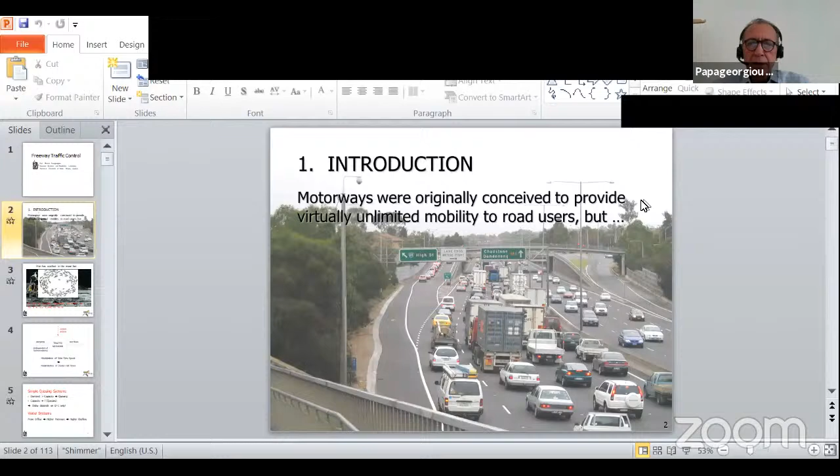And I will try to highlight as much as possible aspects in this application that are related to optimization and optimal control. Yes, I need to maximize, otherwise we have multiple—I will be maximizing sometimes and then minimizing again, because we have this bar here that I don't know how to get rid of. So whenever it is covered, I will minimize again.

Okay, let's start with an introduction. Motorways were first constructed in the 1930s, I believe, or 20s, in the United States. And the original idea was that you have a traffic infrastructure that allows vehicles to drive from A to B fast because of virtually unlimited capacity, and also without interruptions from traffic lights and so on. So the idea was that you have an infrastructure on which you can drive with your vehicle very fast.

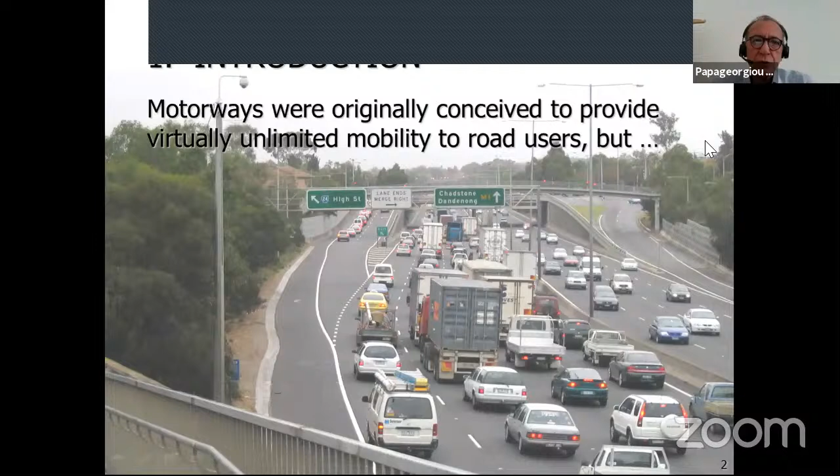But as we know, starting in the 60s, 70s, 80s, and increasingly until now, motorways look more like parking spaces rather than high-speed traffic infrastructures. So, of course, in terms of physical transportation, we have done, as mankind, huge advances. But I think more advances have been done in virtual transmission of data. As you know, you can transmit virtually unlimited amounts of data around the globe virtually instantly. While in terms of physical transportation for our everyday needs, we are still lacking behind.

And this is quite a shame for our human civilization, because even ants, even very simple species like ants, they seem to handle their traffic needs much more efficiently.

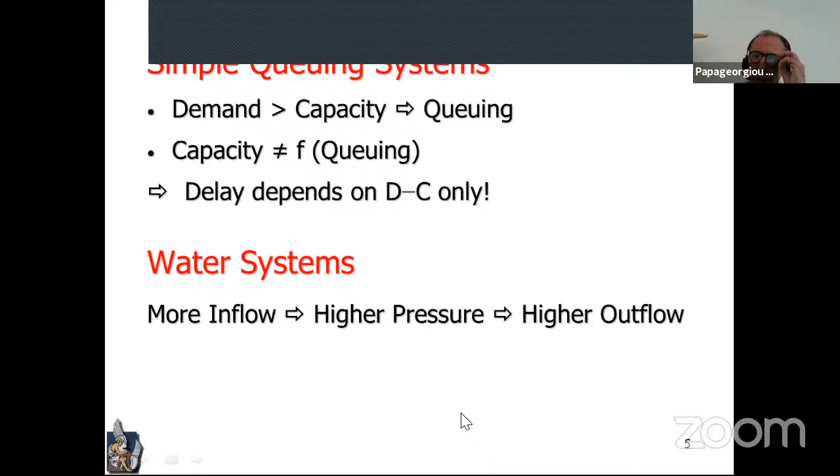What about traffic networks? Well, in traffic networks, we don't have the case of the simple queuing system, and even less the case of the water system. So in traffic networks, if there is queuing, if there is congestion in the network, this degrades the capacity of the infrastructure. And the reasons for that, in the case of freeways, may be slightly different for different kinds of traffic networks. But in the case of freeways, the reasons for this degradation will be explained in a couple of minutes.

So, what is the implication of this? The implication is that if you have a big freeway network, and then at some local link, due to more people temporarily entering the system, you have a higher demand than the local capacity, then you will have a local congestion, and this congestion will degrade the local capacity. But if the local capacity is degraded, then we will have an accelerated increase of congestion, and this will lead to a further capacity degradation, and this will still accelerate the increase of congestion. So you have a vicious circle, a positive feedback here. The system is degrading, and at the end, you have a generalized congestion in the network, which degrades the nominal capacity of that network.

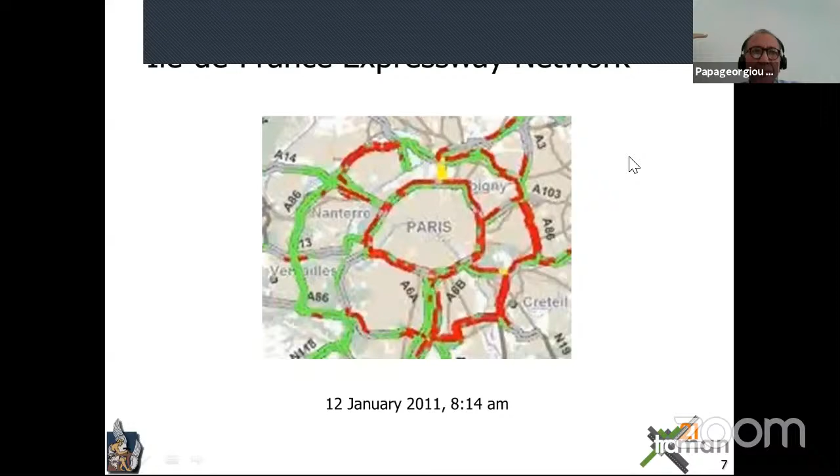So, in conclusion of what we said so far, we witness daily in virtually all freeway networks in and around metropolitan areas heavy motorway congestion. But this congestion is not only because we have very high demand, it is also because the infrastructure degrades. And so we have congested motorway networks because we have a very expensive infrastructure.

Freeways are very expensive to construct and very expensive to maintain. So we have an expensive infrastructure with a nominal capacity which is not fully available. It is degraded, ironically, at the only time it is needed, because the only time we need the nominal capacity is during the peak period. Off peak, we don't have congestion, we don't have high demand. So at the only time we need it, we don't have it because the infrastructure is degraded.

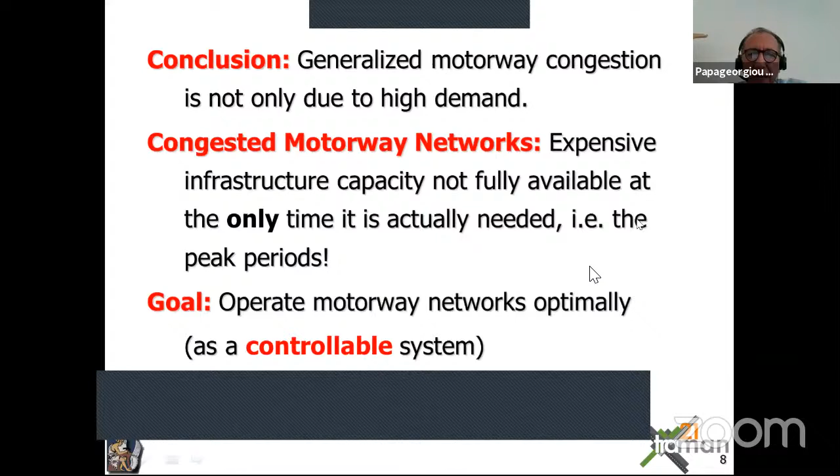And the goal is to operate the motorway network optimally. As control engineers, consider the motorway network as a controllable system which we can influence on purpose and in a way that will allow us to improve the situation.

So in order to control, we will need control measures, control actuators, and we will talk about ramp metering. We will talk mainly about variable speed limits, driver information and guidance, and some emerging or new possibilities.

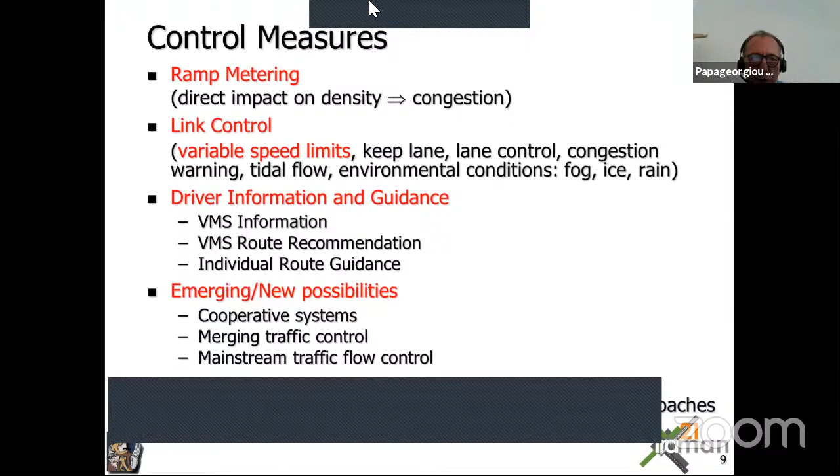I don't need to say it here with you because you are all control engineers, but it's important to stress, when I'm talking to traffic engineers, that when designing the control strategy, it is important to use systematic approaches like optimization, like feedback control, like various methodologies, and not just heuristics, because heuristics have several disadvantages.

I can also go quickly through this diagram of the basic elements of an automatic control system, which applies to any controlled system. So we have a process under control. In order to influence the behavior of this process, we usually install devices that we call actuators. And in order to have real-time information about the behavior of the process, we need sensors. We have an idea about how we would like this process to behave, so we have some output of the process.

With the sensors, we can pick measurements from the process. In some cases, we may even be able to measure some, not all, disturbances. Disturbances are external variables that influence the behavior of the process but cannot be manipulated by us. While inputs, controllable inputs, are again input variables that influence the process behavior but can, within limits, be specified by us.

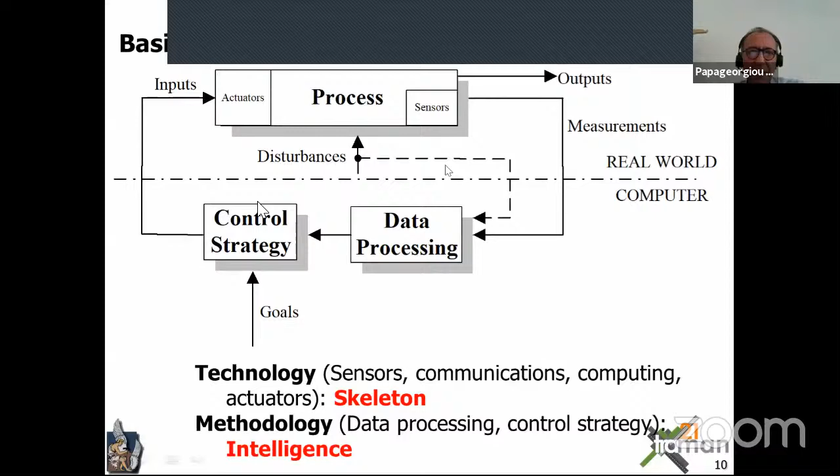Because if you have the best technological process, and unfortunately we have many like this, the best technology in your traffic control system, but you don't have the best control strategy, then it may be in vain that you have all these devices. Of course, if you have a very smart control strategy, but you don't have all the other technological ingredients, you also cannot do something. So we need both, but the important thing is how smart your system can be with the decisions it takes.

Now, if we want to control a process, it is important to understand the characteristics, the features of the process, in order to be able to really do the right actions at the right location. So a prerequisite for efficient traffic control in our case is understanding the reasons for the degradation of the infrastructure that I mentioned earlier, because if we know the reasons, then we can see whether we can counter these reasons and improve the situation.

Now, the main problem with traffic is, of course, congestion. What we want to avoid is congestion. And so the first question is, where does congestion appear first and why? And the answer is easy: at bottleneck locations.

There may be many bottleneck locations. Not all of them will create congestion, so some of them may be latent. But a bottleneck is a location where the capacity upstream is higher than the capacity downstream. Very simple. And if the incoming traffic flow is higher than the downstream capacity, then we say that the bottleneck is activated, that means we have a speed drop and a congestion upstream of the bottleneck location.

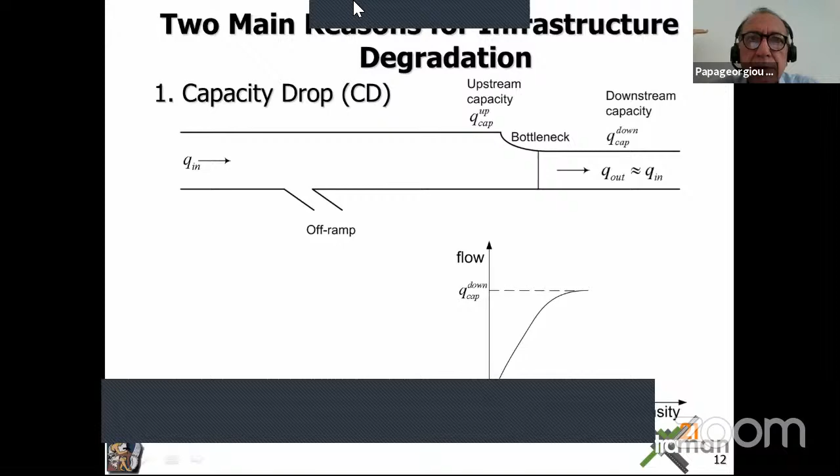And there are two main reasons why the infrastructure on freeways is degraded. So there are two main reasons for infrastructure degradation. And the first reason is called the capacity drop. And I will try to explain.

So assume we have a bottleneck here, meaning the capacity downstream is lower than the capacity upstream. It does not need to be a lane drop bottleneck, as indicated here. It can be an on-ramp, it can be anything else we mentioned, a strong grade, a curvature, whatever, a tunnel, a bridge. So here is the beginning of a lower capacity for some reason.

Now, as long as we have inflow here lower than the downstream capacity, nothing happens essentially. So we have this diagram, which is the fundamental diagram: flow versus density of vehicles. If the density is zero, the flow is zero, obviously. Then if the density is increasing, the flow is increasing. But then you have some capacity - this is the downstream capacity.

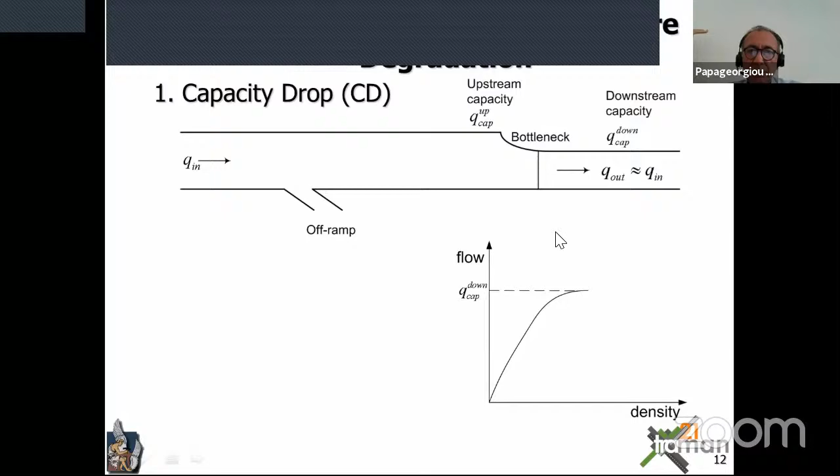If the inflow arriving exceeds this capacity, then, oops, you have a breakdown here. That means that the speed drops strongly and a congestion is forming with a tail that is moving upstream, because the incoming flow is higher than the outgoing flow. So the congestion increases, moves backwards. And what you observe then at the head of the congestion is a drop of the flow.

So as long as there is no breakdown, you may be able to reach the capacity of the downstream. But once you have the breakdown, then you observe a drop of the flow, which is probably due to the fact that vehicles have to accelerate from within the congestion, where the speed is low, to after the congestion, where the speed is high.

And there are vehicles with low acceleration, vehicles with high acceleration, there are trucks. So this acceleration state produces gaps between vehicles, long gaps. And these gaps are responsible for this capacity drop. So it's like the capacity all of a sudden dropped from a nominal value to a lower value due to the presence of the congestion.

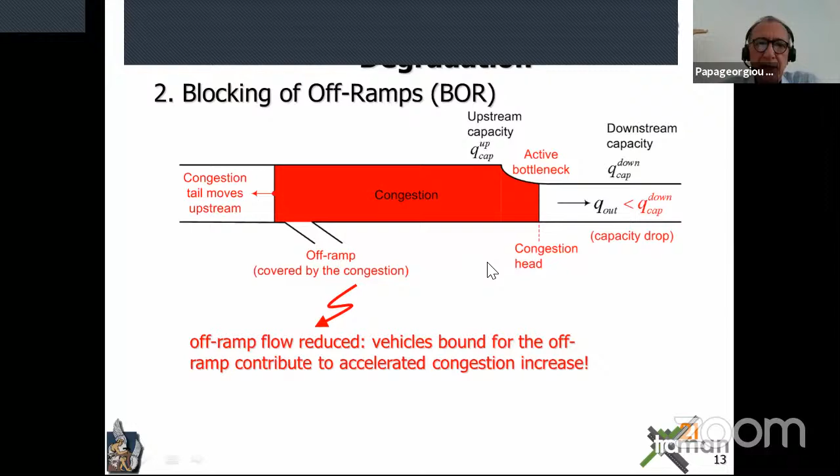So you understand that under these conditions, the degradation can be serious at network level, and we can encounter systems like the example of the Ile-de-France network, but we may have any other congested network.

Okay, so after this introduction, I would like to very briefly go through modeling, because as you know, modeling is necessary whenever we want to control a process for various reasons. And I believe that Professor De Schutter has already talked about macroscopic traffic flow modeling of freeways and about the specific model METANET. Therefore, I will go relatively fast.

So for a freeway network, we can divide it into links of different types and nodes. And as we will see very fast in the next slides, we can end up with the whole network represented by a state space, nonlinear state space equation in discrete time as given here.

So you have a state space equation with state vector x, control vector u, external disturbances, external variables d, where, as we will see, the state x comprises the densities and mean speeds for sections of the mainstream of about 500 meters. So for every section, we have 2 state variables, and also the origin queues at the origins, at the on-ramps.

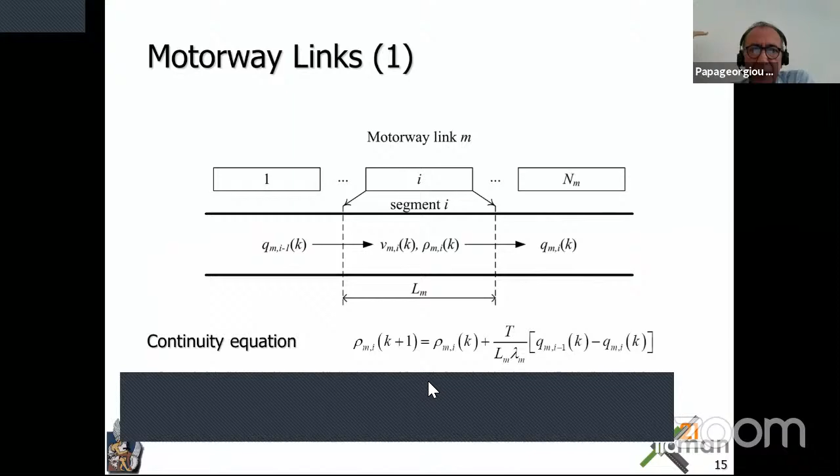Now let's start with the links, the motorway links, the most important part. A link is homogeneous, it has no on-ramps or off-ramps, it runs between two nodes, and a link, number M, is subdivided into segments or sections I. As mentioned, this can be 500 meters long.

And for every such section, we have two state variables, the mean speed and the density. The corresponding state equations, the first one is given here. This is the conservation equation. So any change of density in a section is due to entering minus exiting flow.

The flow from traffic flow theory is the product. The flow at the exit of the segment is the product of density times mean speed.

And the second state equation, of the mean speed, is a bit more complex. It is empirical, given here. So as you see, it is a state equation. We have the speed at time k plus 1 on the left and only variables at time k on the right. And the change of the mean speed in a section from a value at time k to a different value at k plus 1 is influenced by three terms, essentially. We will not go into the details.

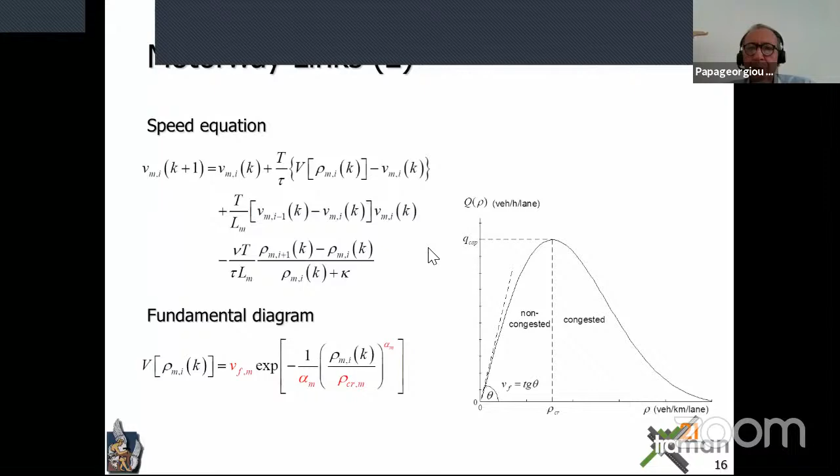Okay, then you may have origins like on-ramps, and this is a third kind of state variable, the ramp queue. We call it here W, O for the origin. So every origin has an additional state variable, which is the queue, and the queue is obtained from a state equation that is again the conservation equation.

The queue increases or decreases according to the appearing demand upstream of the queue, D-O, minus the flow entering the mainstream. And the flow entering the mainstream can be influenced with ramp metering, with traffic lights. So you have here the flow entering the mainstream as the product between the capacity of this cross-section and ramp metering. So ramp metering is modeled here as a control variable, which is between 0 and 1, or between a minimum value and 1, because we don't want to utterly close any on-ramp.

And 1 means that you have no ramp metering, so the flow entering is equal to the capacity. And it is important also that the capacity of entering depends on the situation, on the density of the merging segment. Because if you have relatively free flow, then you can enter freely. But if you have congested flow for some reason, then you cannot enter. So you may have a demand that cannot enter on the mainstream, and this can create a queue. It is important to be able to model this too.

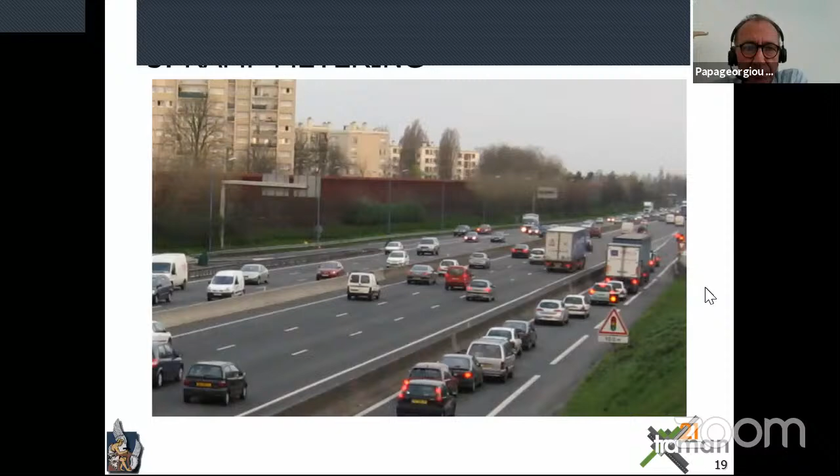And we may ask, why ramp metering? We can give two main answers, and a few less important ones from an operational point of view. These answers are based on what we have understood regarding the degradation of traffic. Assume this situation: you have an on-ramp and an upstream demand. If the sum of the upstream demand and the on-ramp demand is higher than the downstream capacity, you will have a breakdown and a queue. At this point, you will have Q-congestion, that means the flow with capacity drop.

Now, with ramp metering, what we are doing is controlling the inflow from this on-ramp such that we never exceed the capacity of the mainstream, and never fall much below it either. Look at this diagram again, flow versus density. What we want at the outflow is to operate the system at this level. If we are too restrictive, we may operate here, but then the outflow is again smaller.

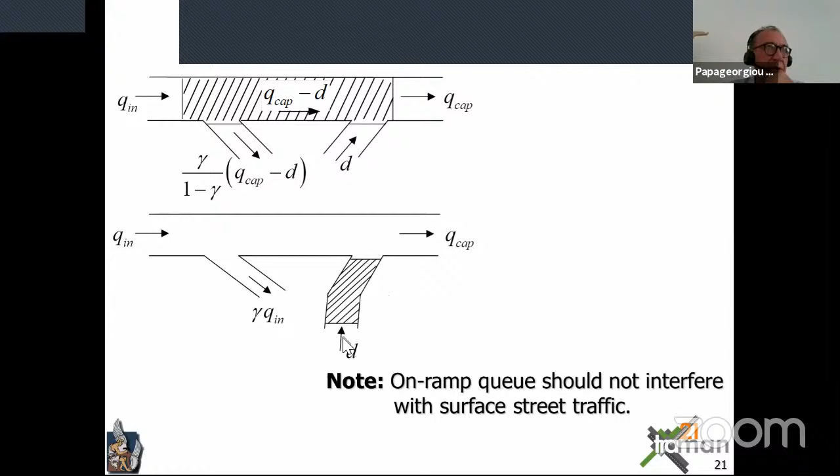Now, there may be other reasons. Of course, the route choice behavior of drivers will change, and you can try to exploit it to use reserve capacities on the parallel arterials. Also, safety will increase because you will have less congestion, but also safer merging. All these things have been measured in real implementations and are really present.

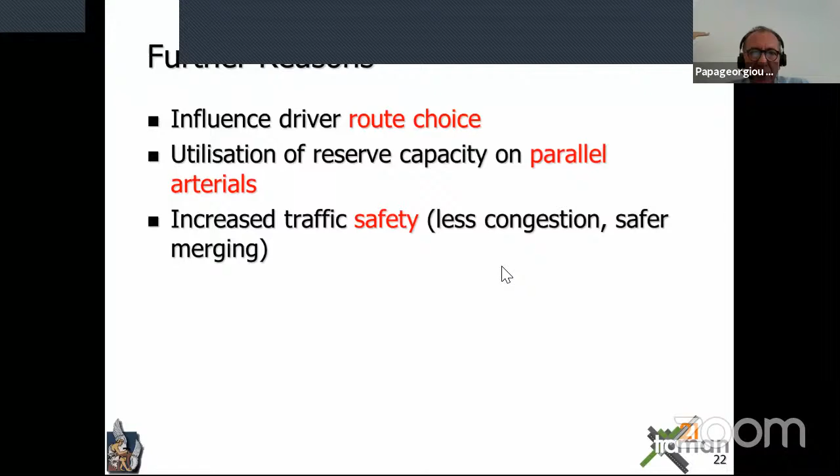Okay, how should we control? Let's start with local control. Local meaning you have a mainstream, you have an on-ramp, and you want to utilize measurements from this region to control the on-ramp flow. And there is such a controller.

This has been around since the 1970s in the United States, and it goes like this. You measure the upstream flow. You assume that you know the downstream capacity, because the goal is what? The goal is to operate the system at capacity. So assuming you know the downstream capacity, you just take the difference between the downstream capacity and the measured upstream flow to calculate the ramp flow that should enter in order to reach capacity flow at the exit. Now, this is a plausible, intuitive strategy, particularly for people without control background.

But of course, in terms of control, it is not really what you want to do, because this is a feed-forward strategy. So it's very sensitive to disturbances. You are essentially blind. You want to control the downstream flow, but in this setting, you are blind regarding what happens downstream. You just measure upstream, but you don't know what happens downstream where you would like to have capacity. So it's not good.

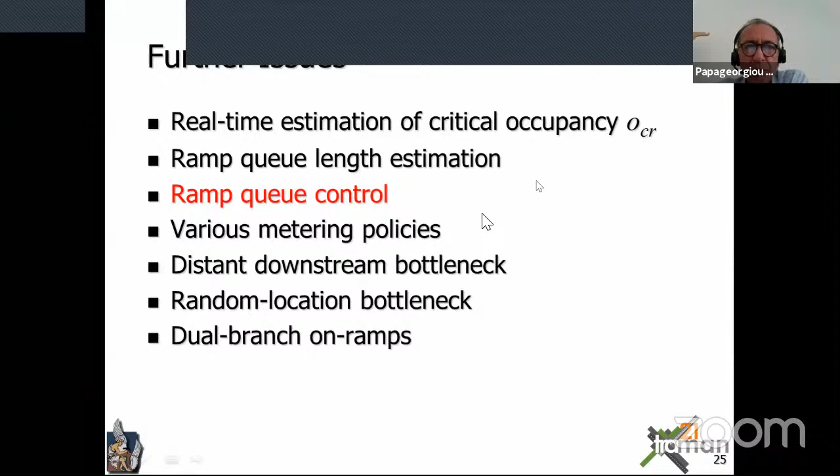Now, we talked about local ramp metering. What is the alternative? The alternative is coordinated ramp metering. Coordinated means you have the full information in the control center from measurements, and then you decide with a unique approach rather than locally about all ramp metering flows.

So why do we need that, or do we need that? Assume we have a situation like this, where we have a motorway leading, let's say, to the city center, and in the AM peak, most people are going there. Without control, without ramp metering, this last ramp contributes the final drop, and you get overflow, congestion. Of course, on the mainstream, you have many people who came from other upstream ramps. This is just the last ramp that contributed the excess flow, and the congestion spreads backwards.

Now, if we apply control, ramp metering, to every ramp locally, independent of the others, and without any restriction on queuing, here is what happens. This last ramp will be controlled by its own ALINEA, which will reduce the inflow so that you have maximum throughput downstream. But this will create a queue, and this queue may need to be relatively long, because in such a setting this ramp will pay all the pain to keep the system running at capacity. So such a policy would be optimal from the total time spent point of view. But the poor drivers here will need to wait for the others, and this is not desirable and not realistic, because they will not do it. They will divert probably to other ramps and change their behavior.

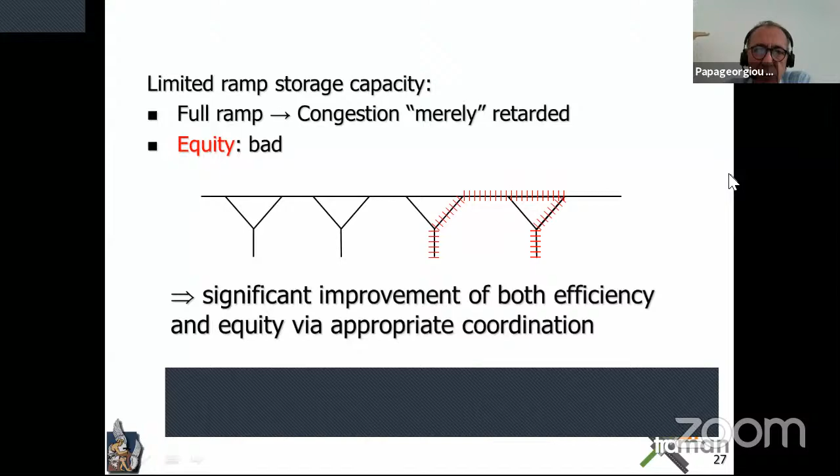So how can we coordinate? One way is by applying nonlinear optimal control, in which we consider the limited storage capacity of on-ramps, the capacity in terms of traffic volumes for on-ramps. We may try to be equitable, that means to distribute queuing among multiple ramps, not put all the pain to one ramp.

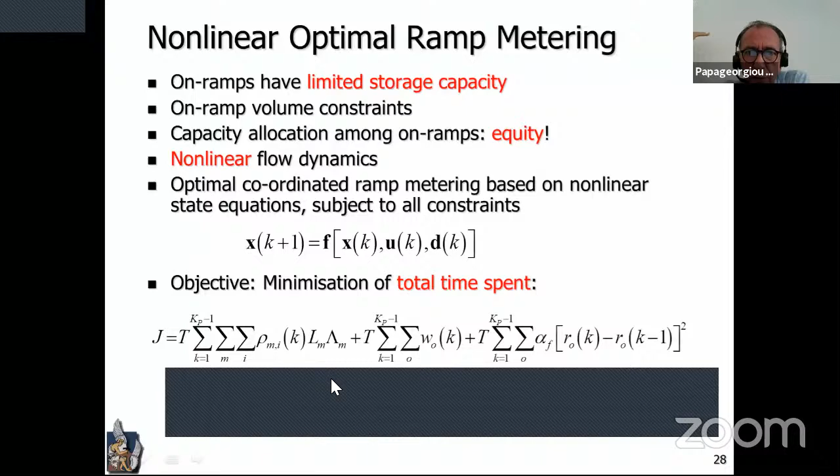We may consider the nonlinear flow dynamics as given by the state equation, the nonlinear state equation. In this case, the system knows everything, knows about the dynamic behavior of the process, knows about the constraints. If we also specify an appropriate objective criterion, we can have an optimal control problem in discrete time.

The objective criterion can be the total time spent, which is a linear function of the state variables, specifically of the density and the origin queues, over a future time horizon. We may also consider some operational terms, like the change from time step to time step of the ramp metering, to avoid very harsh changes, and also penalize queues at origins exceeding the maximum queue available.

So this is a large-scale optimal control problem if we are talking about a large-scale network. And in fact, there is a software tool called AMOC which solves this problem even for very large-scale networks within very small computational time, in the order of 1 minute.

But what is important is that optimal control, optimization more generally, when applied properly, has an inherent intelligence in the sense that by solving this optimal control problem, it suggests to us control measures, ways of exploiting the control measures that we, as experts of traffic flow, wouldn't have thought of if the optimization hadn't suggested it to us.

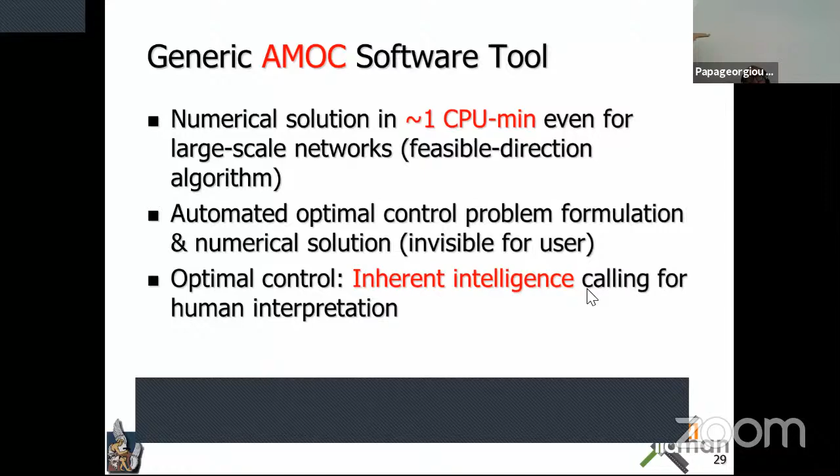Okay, so let's see an example. We take the ring road of Amsterdam. Only one direction, the counterclockwise direction, is considered here. It is 32 kilometers long. It has 21 on-ramps and 20 off-ramps.

We will consider this problem for a period of 4 hours with a time step of 10 seconds. So the total number of involved variables is about 250,000 in the optimal control problem. In terms of traffic, there are 21 on-ramps, so 21 control variables in principle, but we have 17 on-ramps being urban on-ramps and 4 of them being motorways.

So there are 4 motorways merging into this ring road motorway, and these are A1, A4, A8, and I believe there is one A2 here. Yes. So 4 ramps are merging motorways.

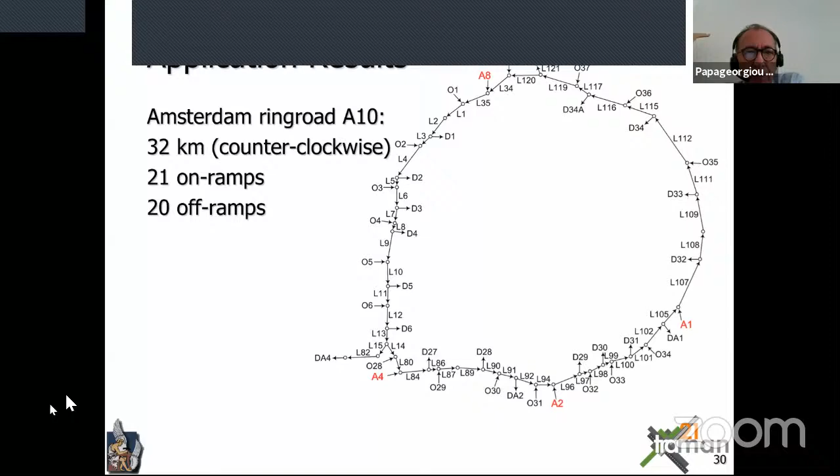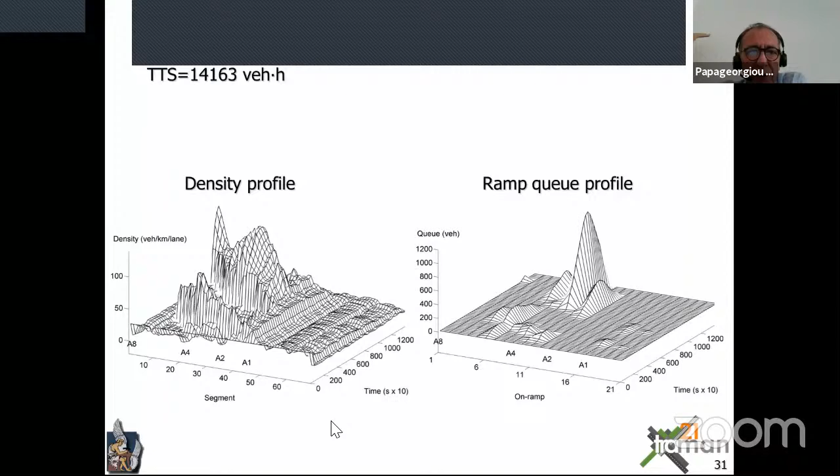And we can now play various games using AMOC, using this intelligent guy. And we have learned a lot. The things I mentioned earlier about coordination, most of them we learned, we understood by looking at what AMOC is doing and what AMOC considers as optimal handling of the situation.

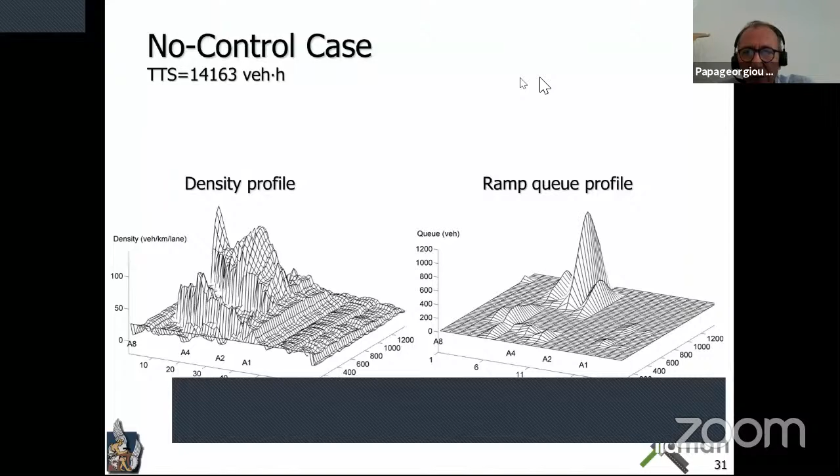So let's play the first game. We assume that we apply optimal ramp metering without queue constraints. We can store at the on-ramps anything we want. Then we get an amazing 50% reduction of total time spent. That means the average travel time in this system, including the waiting at the on-ramps, is reduced by 50%, which is huge. And indeed, if we look at the resulting density, there is no congestion.

If we look at the ramp queue profiles, we see what we were expecting. Essentially, there is a big queue at A1 because that's where the bottleneck is. So as we predicted, or learned after this, there is a big queue created at the bottleneck location.

And in this way, mainly, there are some other queues, but in this way, mainly, the congestion is avoided, the throughput is optimized, and we have 50% reduction.

However, as also mentioned earlier, this could be achieved in a much easier way if we apply ALINEA local control without queue constraints. We get also 47% by pure feedback at every local on-ramp. But again, we create this big queue, which is unacceptable.

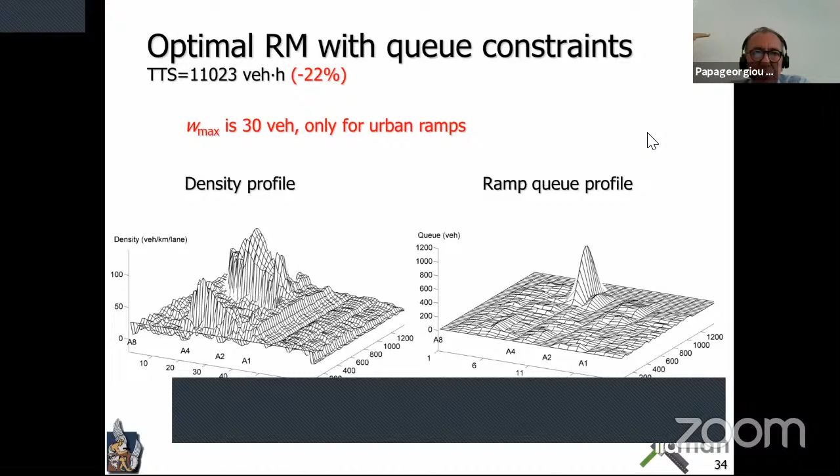Now the question is how much more space do we need to regain the 50% we had without ramp queue constraints? Indeed, if we allow the 4 freeways storage space of 200 vehicles, on top of the 30 vehicles of the urban ramps, then we regain the 50%.

So in that case, you see again no congestion. Respecting the 200 limit, we are able to avoid congestion. And of course, 200 vehicles is not so much, because with merging freeways, you have much more space than on a small on-ramp.

We are talking here about a system that serves about 20,000 vehicles per hour. So having a storage space of a few hundred meters here and there does not sound extremely difficult.

Now, optimal control is valuable, but in practice, not every infrastructure owner will be keen to use optimal control, and in some cases the operators may not be so keen either. We can always design smart things in our computers and write papers, but when we talk about applications, the big challenge is to go to the field and apply, and see the improvements really materializing.

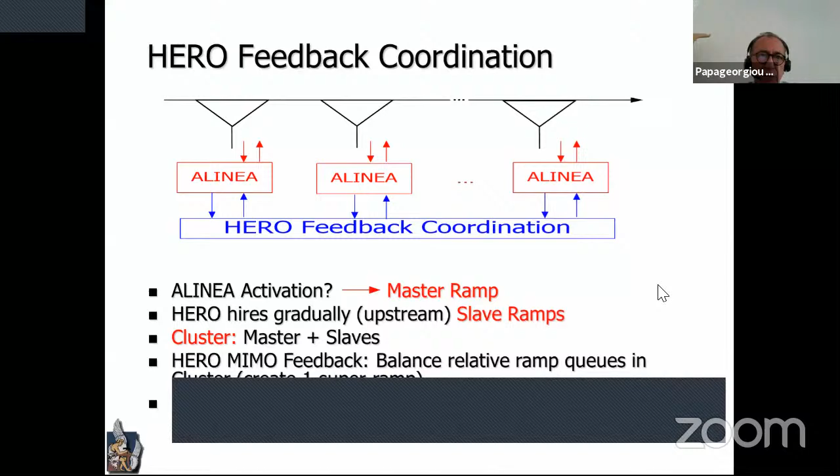So we have some heuristic rules with appropriate feedback loops inside, which essentially mimic what we learned from AMOC and implemented in HERO. We tested this with the same example, and we could see that, at least for this scenario, we could again reach 47%, close to the 50% we had earlier. This is more robust because HERO is purely feedback. You don't need any demand prediction, you don't need the model to be perfect. The model is what it is. HERO works only as feedback.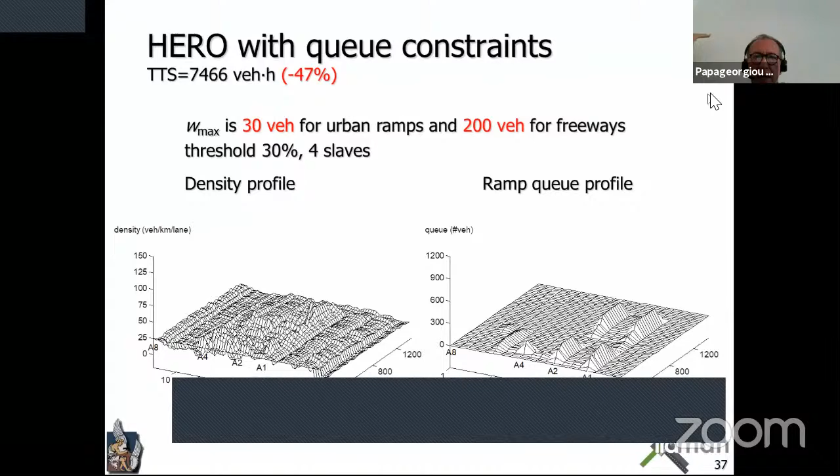By the time we finished HERO's development, we had the luck to encounter some very progressive authorities from Australia, from the state of Victoria, and they were keen to test the strategy. We did a test on 6 consecutive on-ramps, and there was huge success in the outcome. They calculated that the expenses for the system were paid back within 11 days, considering all the benefits to society due to less fuel consumption, less time delay, and so on.

Meanwhile, HERO is operated on all freeways in the state of Victoria in Australia, and also in Queensland, Brisbane, another state, and also Perth, Western Australia, another state of Australia. It is currently also being tested in Colorado in the United States, and there are other installations that may come.

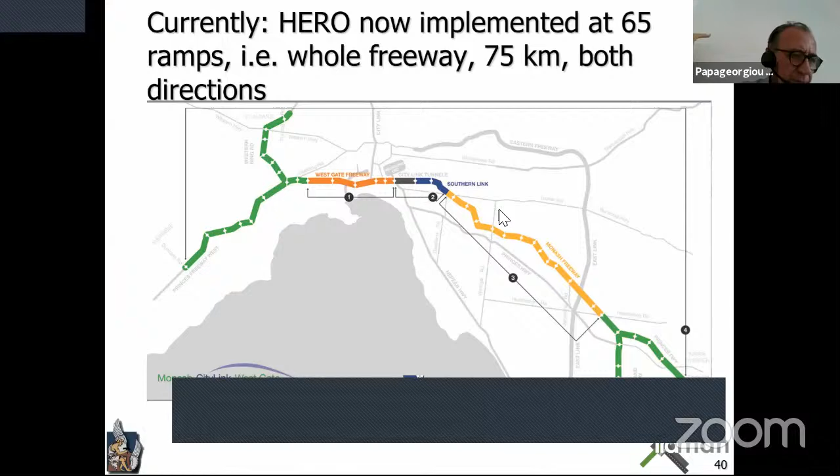Wow, I took a very long time. I need to speed up strongly.

But the automated operation of speed limits started in Germany around 1970. Meanwhile, there are many application stretches in Germany, in many other countries, the Netherlands, United Kingdom, United States, Australia, probably also Switzerland.

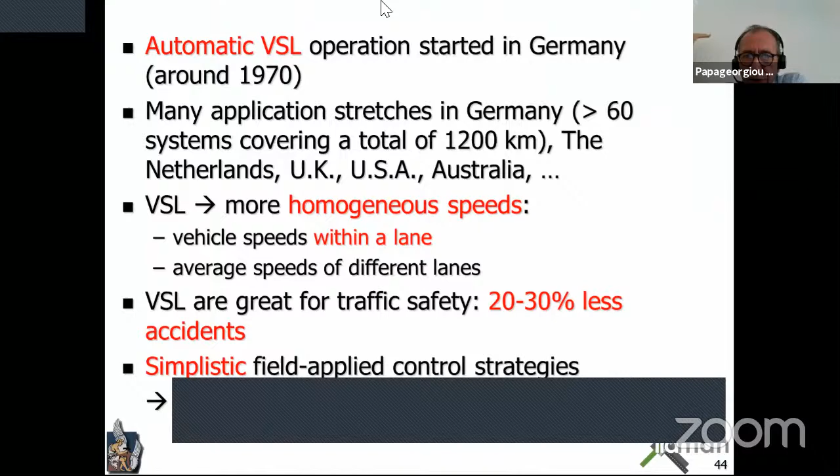Variable speed limits are good for safety, and it was found that they can decrease accidents by 20 or 30%, which is great. But the variable speed limit strategies applied until now in the field are very simplistic, so you cannot expect improvement of traffic conditions.

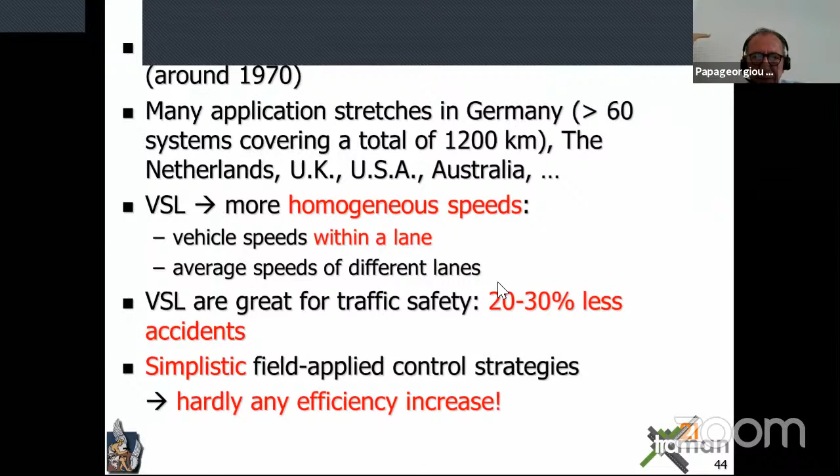So in order to do that, we need to better understand the impact of variable speed limits. There were several assumptions about how particularly the fundamental diagram is changing when you apply speed limits.

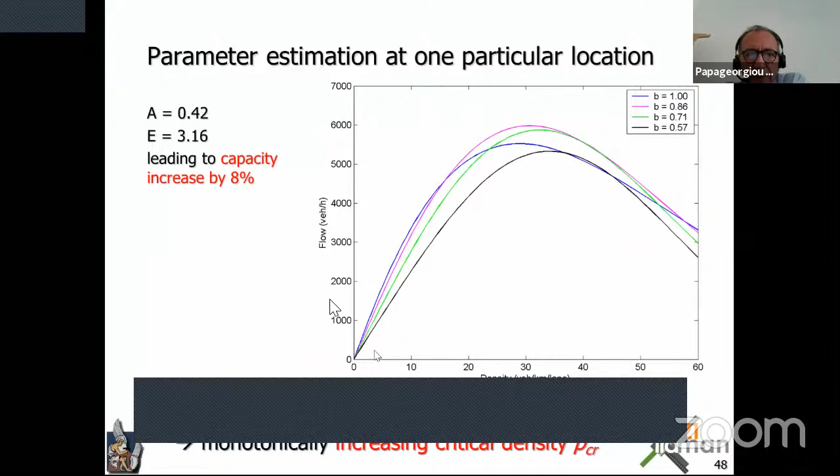We did an exercise of calibration with real data from the UK, where 4 different variable speed limits were applied: no speed limit, the blue curve which is 70 miles per hour, and then 60 miles per hour, 50 miles per hour, 40 miles per hour.

As you see here, and as one could expect, there is a shifting of the free speed, because the free speed is the tangent at the origin of the fundamental diagram, since flow is speed times density. So the slope of the chord joining the origin with any point of the fundamental diagram is the mean speed. We see that with decreasing variable speed limits, we have decreasing density and decreasing free speed.

Also, the critical density shifts to the right with decreasing variable speed limits. In this case, we have an increasing capacity for some variable speed limits. But when we did that at another location, there were the same effects for free speed and critical density, but no increase of capacity. In other experiments with data from Australia and Germany, we found out that there is no increase of capacity due to variable speed limits.

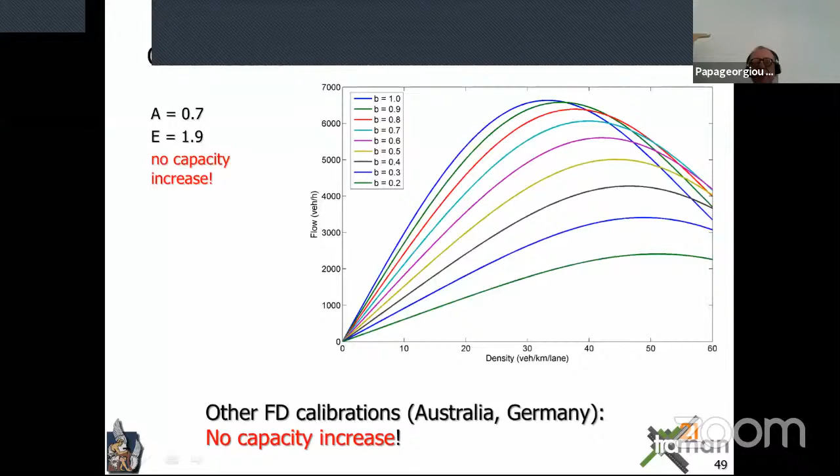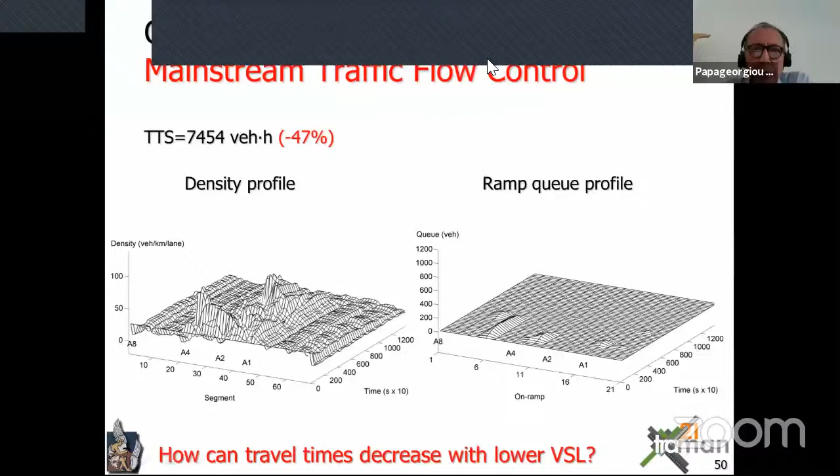So the question is, how can we influence favorably the traffic flow by decelerating it, by decreasing the speed? To make sure, we entered the equations of variable speed limits into the METANET model and the AMOC tool, and we ran the same situation as before. We were very surprised to see that by using just variable speed limits, we got an improvement of 47%.

You see here some congestion, but not really strong. No ramp queue, we don't apply ramp metering, and there is no spillback since there is no congestion. So AMOC, this intelligent guy, could specify a way to exploit a tool that decelerates traffic to improve traffic conditions.

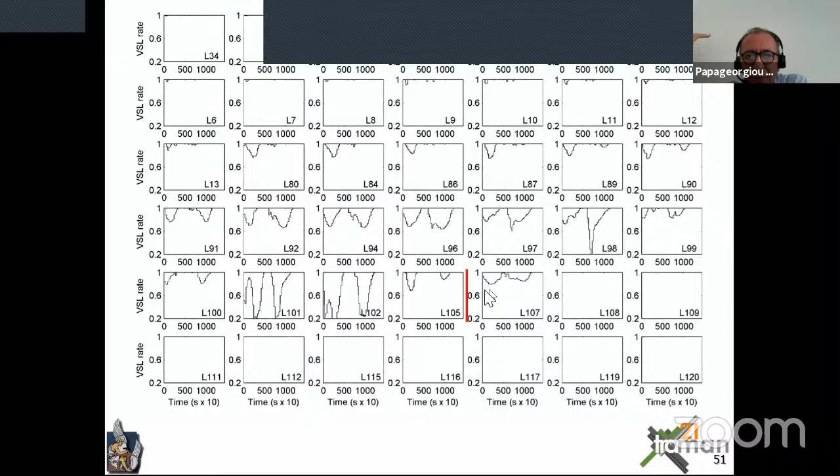And that was, of course, a huge question. How did it do it? Was there any bug in the system? How can you lower variable speed limits and increase... how can you lower variable speed limits and decrease travel time? Because that's what happens here, travel time is decreased. We needed to do a very thorough elaboration of the results to understand as humans what AMOC provided spontaneously, and the answer is given here.

Consider the same situation as before. We have a bottleneck, a lower capacity downstream than upstream. If we have no control, we will have congestion starting here, as we know from before. So what is the variable speed limit doing?

The variable speed limit is creating a congestion at some distance from the bottleneck, a few hundred meters. Why at some distance? Because if this congestion were created at the bottleneck, we would have capacity drop and no change compared to no control. But if you create it farther upstream, then the vehicles have time to accelerate out of the congestion and reach the bottleneck at a higher speed.

And if you control the outflow of the congestion so as to have no congestion here and maximum flow at the bottleneck, critical density, then you maximize the throughput. In other words, by holding back traffic on the mainstream rather than at an on-ramp, you do the same thing: you avoid congestion at the bottleneck and you avoid capacity drop.

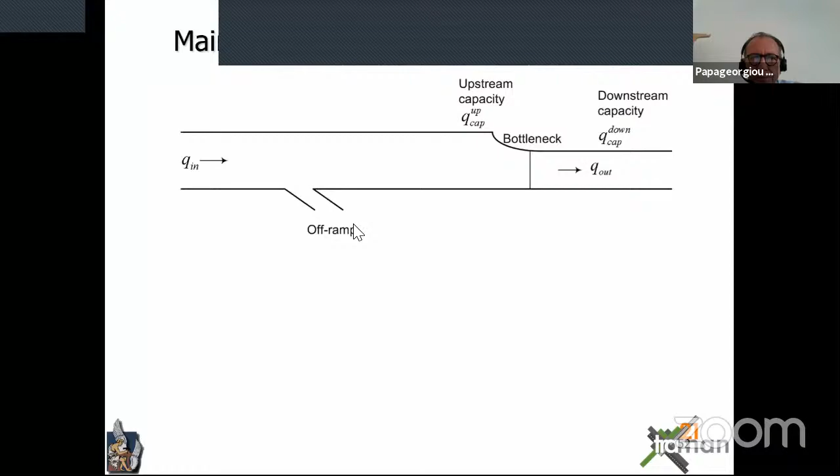But as we have seen, variable speed limit is also very good. In this example, 47% of improvement. So this is what was discovered by AMOC and can be applied.

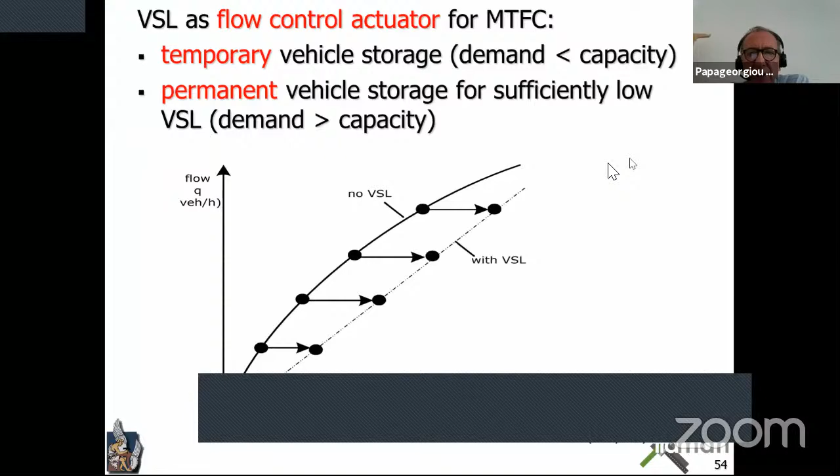And so, as mentioned, variable speed limits are used as control actuators for holding back traffic. There are two ways of holding back traffic: one is temporary and another one is permanent, but I will not go into the details of that.

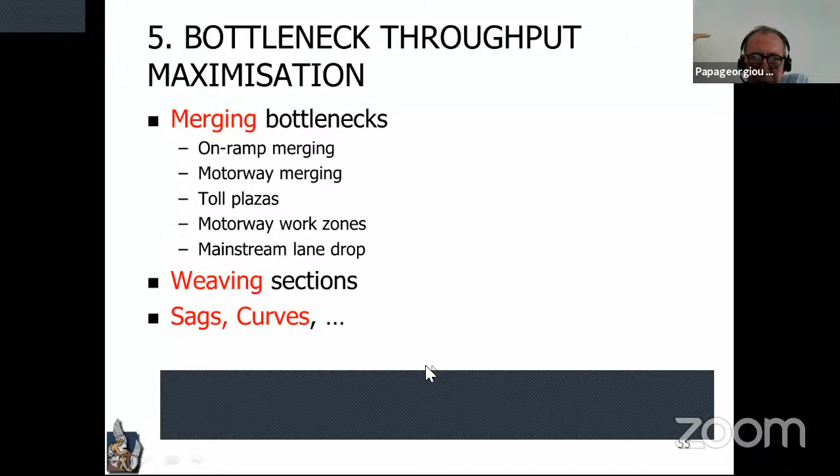Based on this, we can think about more generally bottleneck throughput maximization for any kind of bottleneck: merging bottleneck of various kinds, weaving sections, sags, curves, and so on. All these are bottlenecks, as we know, and also tunnel or bridge entrances. All these can be bottlenecks, and for all these we may think about a local control that would maximize the throughput.

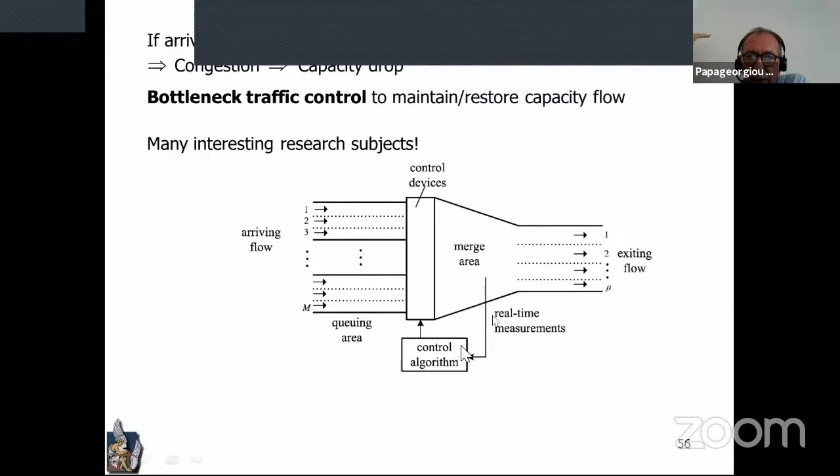So in all these cases, we may have an outflow that we would like to maximize. We may have an inflow, even by multiple highways or other infrastructures. If we can control some of these entrances, based on feedback, like we do in ramp metering but now generalized, then we can maximize the throughput.

Control devices can be traffic lights, as in ramp metering, can be physical barriers, as in toll plaza systems, can be variable speed limits, because they can also be used to hold back traffic, or can be emerging vehicle-to-infrastructure technologies. While some lanes can also be free, we don't need to control everything. For example, in ramp metering, we don't control the mainstream, right? We only control the ramp.

So the approach is similar to the local ramp metering. We have as a main goal to keep occupancy or number of vehicles in the merge area near a set point, an optimal set point that maximizes the throughput. And then, given these, we can apply something like PI ALINEA to calculate a total flow that needs to reach the bottleneck. We may then distribute the flow into sub-flows according to different entering roads, and then we translate these into control decisions.

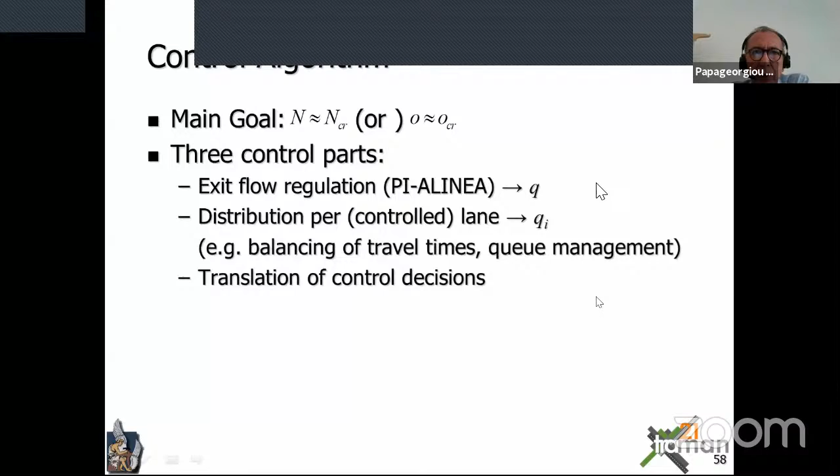So let's see an example: a toll plaza, specifically the one that connects Oakland with San Francisco, the Bay Bridge. Here we have a 15-lane highway because there are booths to pay the toll. And then after this, you have a merging area, and then you have the bridge of 5 lanes. So you have 15 lanes merging into 5 lanes. And of course, if you have a high demand, you may have congestion.

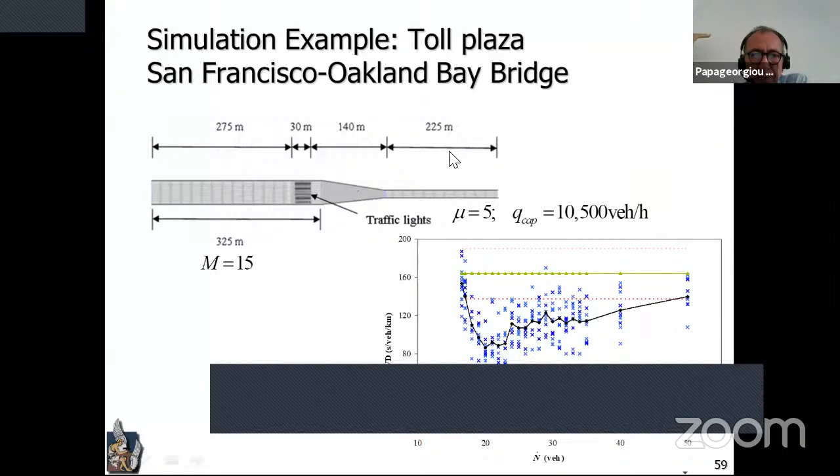And we will see a simulation, first without control. So you will see here, without control, that vehicles are moving, but due to mutual hindering in the merge area, the outflow here is reduced by about 15%, I believe, in the simulation. So this is the no control case.

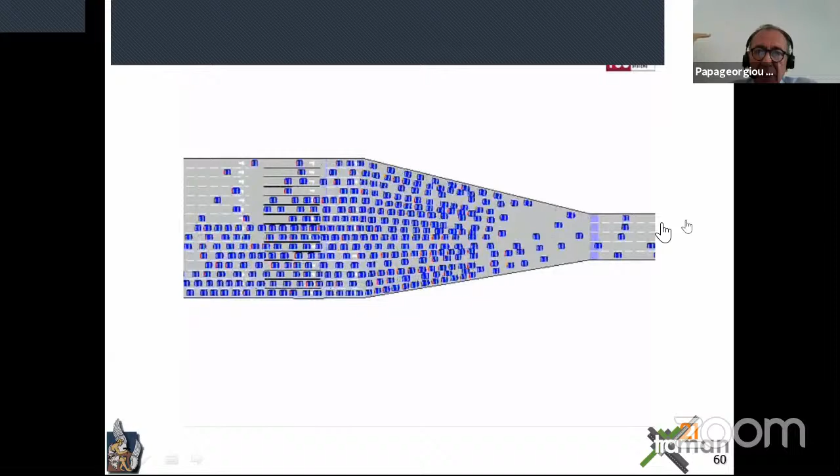Why do we have the capacity drop here? Well, one could intuitively answer simply because we have too many vehicles in the merge area. Okay, but if on the other side I would have too few vehicles in the merge area, then I would also have a reduced outflow, because I don't have enough vehicles to feed the bridge. So between too many and too few, there is probably an optimal number of vehicles that produces the maximum throughput.

So we can control the system using traffic lights for every entering lane. We can have a feedback from here to the traffic lights to control the inflow, and the goal of the feedback should be to have here this optimal number of vehicles. In this case, it turns out to be 20. So the feedback controller will strive in closed loop to maintain about 20 vehicles, and these 20 vehicles then produce the maximum throughput.

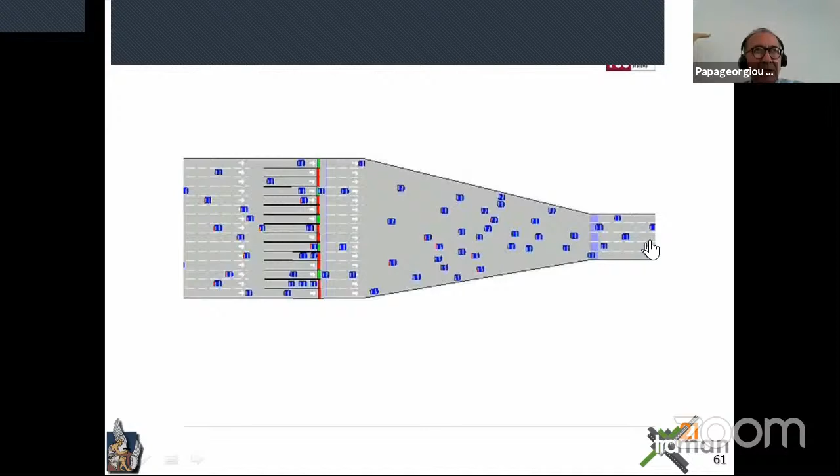So you see it here in the simulation. We have traffic lights here, green, red, that are changing not like urban traffic lights, but just for 1 or 2 vehicles to cross. This increases strongly the throughput, 15% as mentioned, and so the queuing here is much less than it was previously.

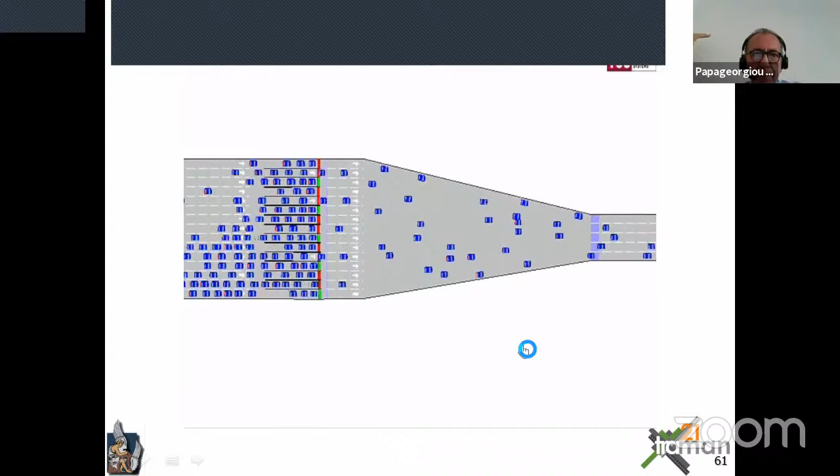And the same thing can be done at work zones. So if this is the work zone, we go from 3 to 2 lanes, then if you can apply traffic lights upstream and use measurements from the merge area, you can again, in the same way. Here's the no control case: the inflow is higher than the capacity downstream, and as you see, you have a congestion being created. The congestion will increase, of course, depending on the arriving demand.

While in the control case, you have here traffic lights. So you are measuring the density in the merge area, feeding it back, and whenever needed, you will see traffic lights separate for each lane that reduce the inflow. So if there is any stochastic breakdown here, it will reduce the congestion, and it will maximize the throughput.

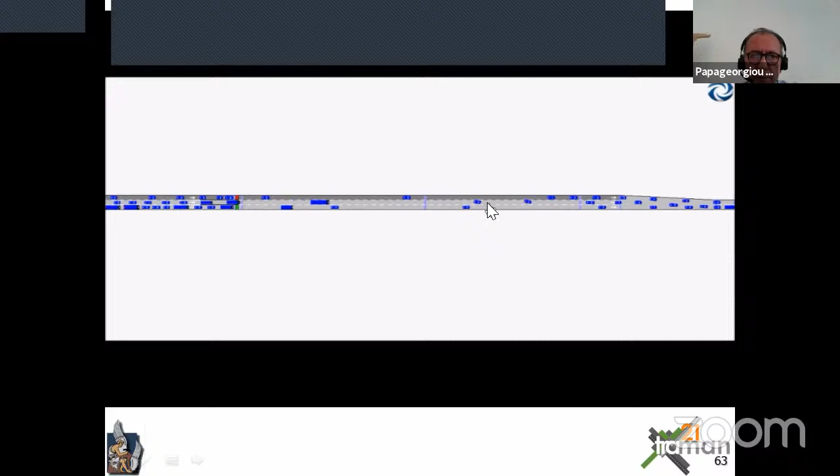And the same thing can be done, that was a German project, with variable speed limits. So you have here again a lane drop, from four to 3 lanes this time. You can measure the traffic conditions in the merge area or upstream of the merge area, and you are now operating a variable speed limit which will control the traffic so that no congestion appears in this area.

And we can see a video of that as well. In this video, we have the control case here and the no control case here. The merge is at the right-hand side of both, and here is the variable speed limit indication which controls the flow. So at the beginning, the demand is not very high, so you don't need any control. It shows 100. But if we advance in time, in both cases, you see it is already 80.

Here in the no control case, we have already congestion, which creates capacity drop, and so it increases. While here, every time you have dense traffic like now, you see the speed limit going back, 70 right now, goes to 60 also, or to 50, to dissolve the congestion in a feedback operation. You will see it here also being dissolved. Now it is 60, so that it doesn't really stay here and doesn't affect the outflow. So it's already 50 now.

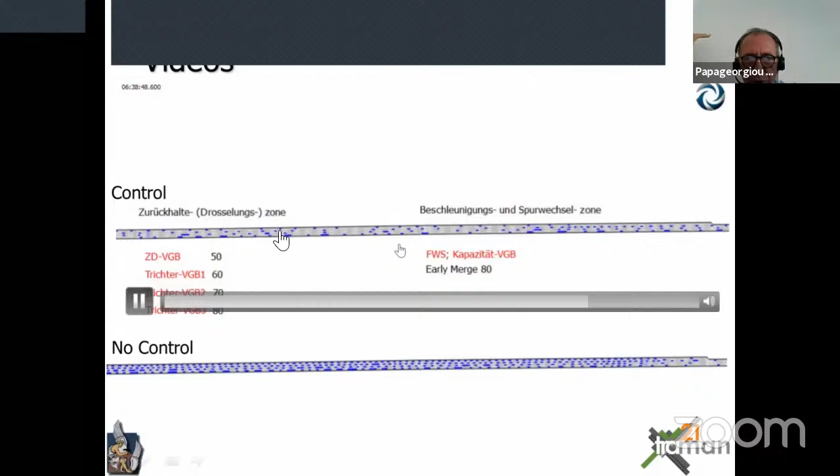And as you see, the temporary small congestion can be resolved thanks to the feedback, while in the no control case, there is no such mechanism and the congestion increases. And if we go farther in time, you see here, again, no congestion. Any small congestion is dissolved by the feedback, while in the no control case, we have a strong congestion.

Okay, so this means that with variable speed limits, we can do a lot of things, even if we have merging motorways and we don't want to apply traffic lights on the mainstream, we can do it with variable speed limits on the one merging motorway or on the other, or even on both. In this case, we have an extra degree of freedom that we may use to do an additional task, for example, balancing the delays on both sides due to holding back. And same if you have a mainstream and an on-ramp.

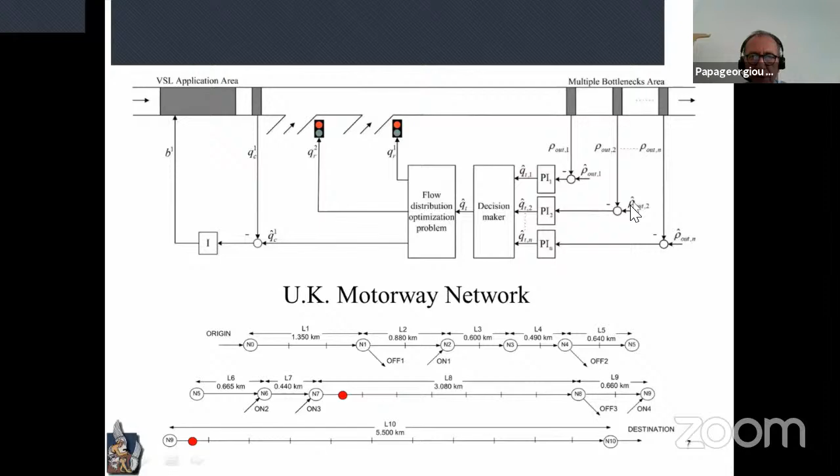There are even more elaborate case studies for real networks. Unfortunately, I don't have the time to go through it. You can, of course, anytime also email me asking for additional information, either for things that I have already explained or for things that I did not have the time to explain in detail.

So let me say just a few words about route information and guidance.

Of course, there are signs, fixed signs in this network, but particularly during peak periods and due to accidents, there may be a lot of congestion, and even if commuters know about the congested conditions, there may be a lot of accidents that are unpredictable and can...

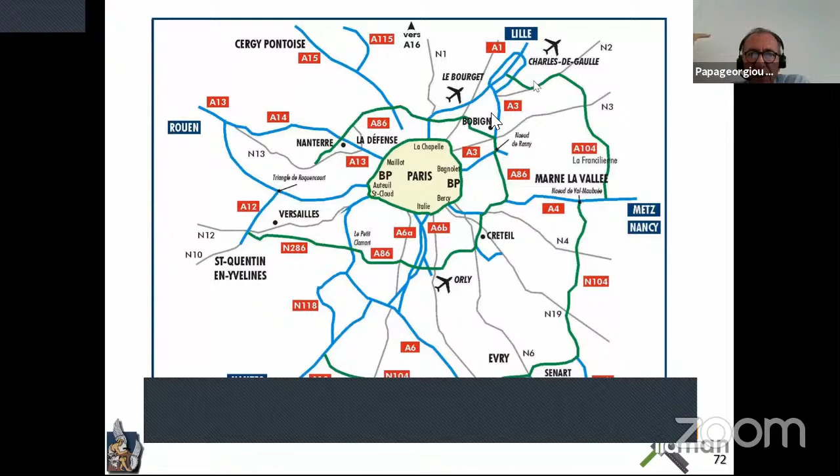So the problem is how to operate variable message signs that have been installed in order to facilitate a better exploitation of the available infrastructure.

Even for commuters, this can present challenges regarding route choice. Here we have essentially two kinds of actuators. The first is about informing drivers about the traffic conditions. The second is about guiding them according to their destination. Each of them have advantages and disadvantages, but essentially the most potentially efficient is route guidance, and the most challenging, of course, also regarding the control strategy to be designed.

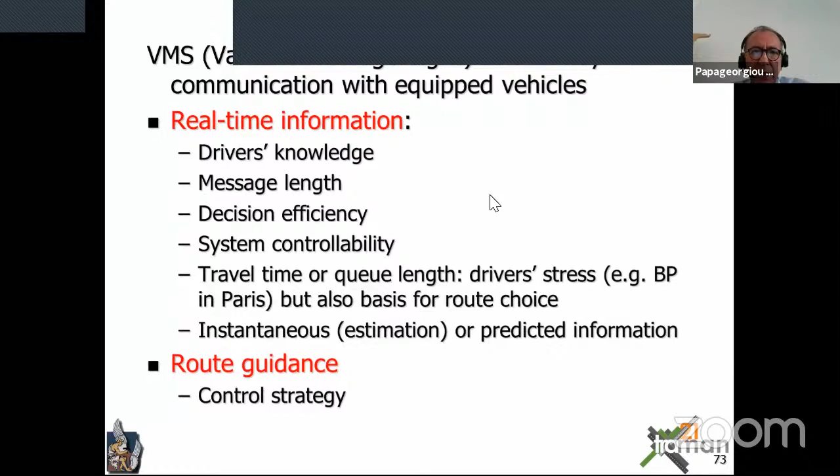There are many examples of such systems. We don't want to go through all of it and the different kinds of displays. There are several very interesting issues here regarding modeling.

How do we model the route choice of drivers? Regarding control, are we aiming towards minimizing the total travel time of all vehicles? Or do we care about having equal travel times on different routes connecting an origin and destination? In the first case, we are talking about system optimum, when you optimize the total travel time. In the second case, we talk about user optimum, when you guarantee that you never guide drivers towards longer routes than others.

Even for information systems, there are interesting questions regarding how do you calculate travel times. If you take just what you can deduce from sensors, then we have the instantaneous travel time. But this may be different than the travel time that drivers will experience on their way, because as they drive, as they travel, the traffic conditions keep changing. So whatever you thought it would be when they entered the system may be different at the time they are at different parts of it.

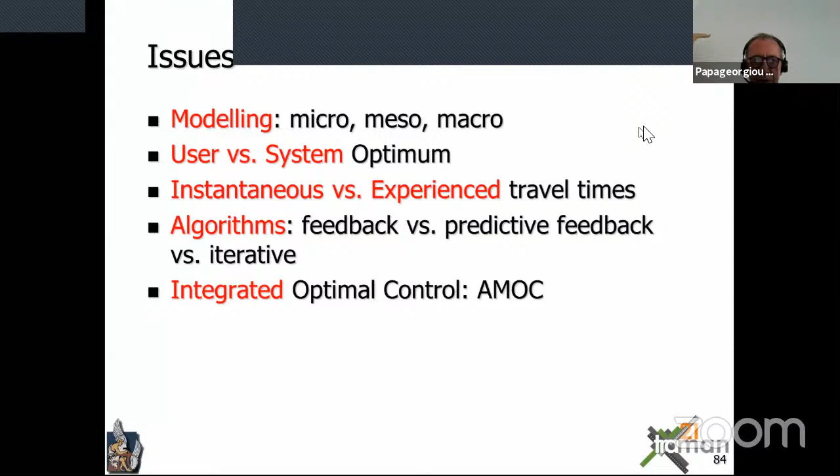There are also different approaches in terms of algorithms and methodologies, like feedback versus predictive feedback versus iterative control. And also AMOC can be extended to consider route guidance as well in the system optimum sense.

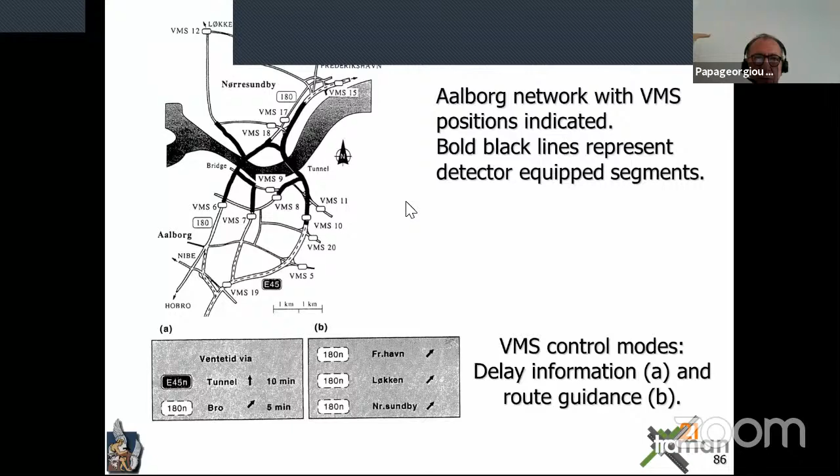These were two case studies: one for a city, which is Aalborg, and another for a whole area, which is Scotland. The difference is that in the city you have small distances, so you can apply feedback control, while in a bigger network like the whole of Scotland, with Perth, Edinburgh, and Glasgow, you have a triangle of 100 kilometers for each side.

Here you have really long travel times, and it is not possible to work based on feedback, because whatever you do based on information now may be quite different when these vehicles reach specific locations in the network. So you do need some prediction for this kind of system.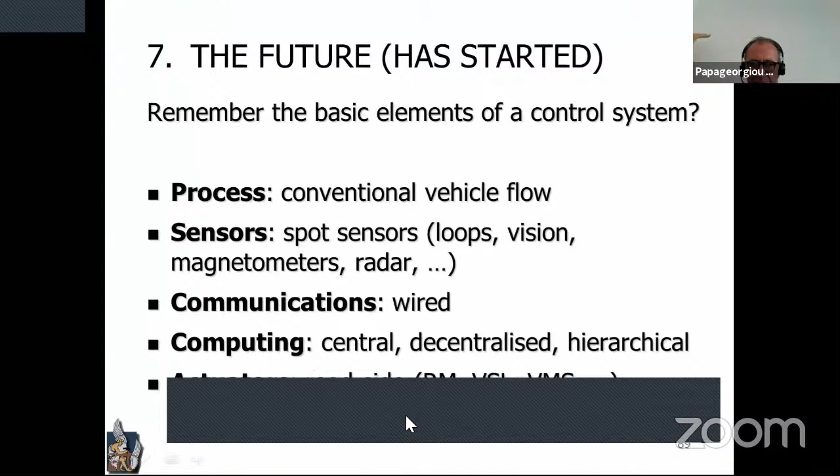Another interesting subject is the future. So in the future, as you know, vehicles are going to change. In the current system, the process is the traffic flow. The sensors are spot sensors in the system. Communications are wired. Computing architecture is usually hierarchical, and the actuators are roadside, meaning that everybody, all drivers, look at the same signals.

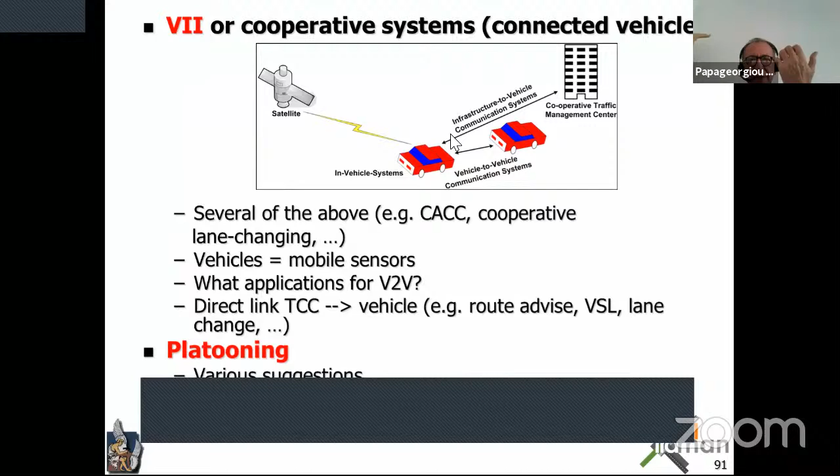But with changes that we expect, and are partly already there, in the capabilities of vehicles - vehicle automation in various respects - we have different vehicle capabilities, and also vehicle connectivity, meaning that vehicles may be talking to each other and may also be talking to the infrastructure in a wireless mode. This leads to quite substantial changes in the whole process and in the whole control loop.

Specifically, the process is, of course, still the flow of vehicles, but now the flow of vehicles with enhanced capabilities. Sensors - if the vehicles are connected, then they can measure various things. They know their own speeds and can measure various things, and they can become moving sensors, submitting the information they gather.

Communications - not only is it going to be wireless, but you have many new communication channels. Vehicles can talk to each other, vehicles can talk to the infrastructure. So you can use these channels to do things better. These channels were not there, are not there, in conventional traffic.

Computing architecture - well, what we have in the case of automated vehicles and communicating vehicles is thousands of computers, essentially, interconnected. And so a lot of things can be done within the vehicles rather than being done in the traffic control center.

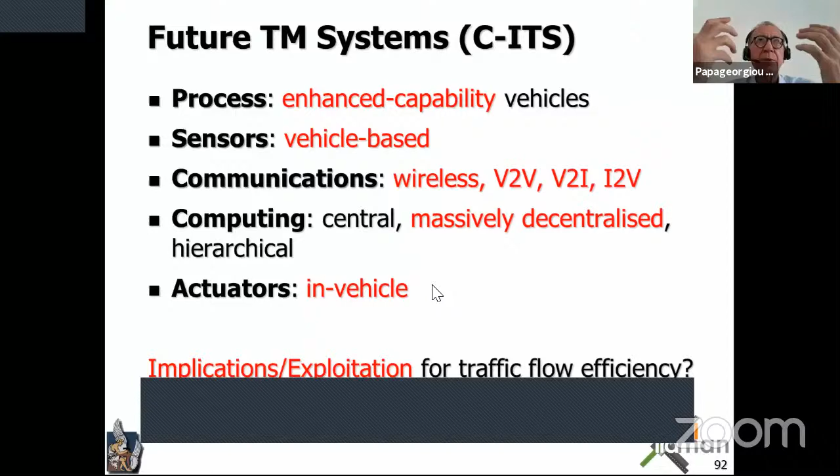And last not least, if vehicles are connected, you can talk to them. So you can give different control instructions to different kinds or classes of vehicles. You don't have just the roadside actuators - the traffic lights, the variable speed limits, and so on. You can do things also individually for each vehicle. And this opens up really some new opportunities of traffic management, of influencing traffic compared to today.

Now, if we have connected and automated vehicles, what is the possible architecture? Some people think that we may eventually go for a completely decentralized vehicle-embedded traffic control, traffic management. Like, for example, as happens in nature, you may have bird flocks or fish schools where there is no central controller, no coordinator, no leader, and the emerging behavior of the whole flock or the whole school is determined by the individual behaviors of its particles, of its members, of the individual fish or birds. And this is possible.

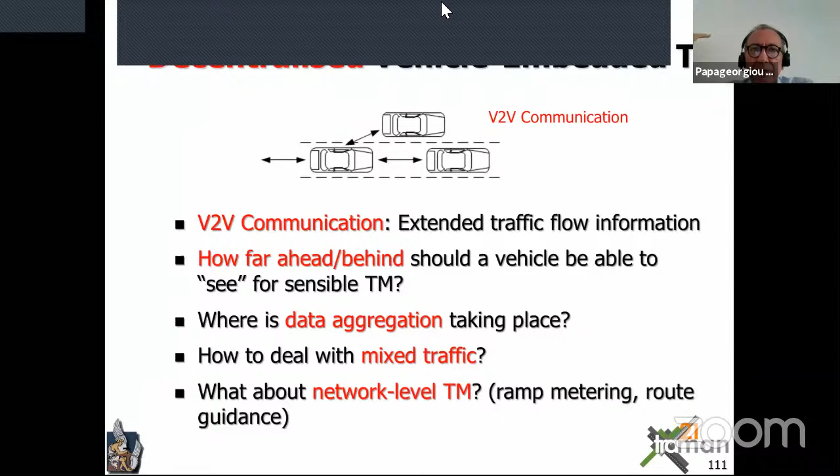However, of course, it's not obvious at all how this can happen in traffic. We may increase the extent of sensing of every vehicle via connectivity and have, again, a decentralized vehicle-embedded traffic management, but relying not only on the sensors of each vehicle, but also communication. Still, it may be hard to develop such systems.

So we may end up again with a hierarchical traffic management, where some things are done at vehicle level, some things are done at V2V level, and some things are done at the infrastructure level, at traffic control level. And what is the exact sharing of these tasks is something that currently is investigated by many control groups around the globe.

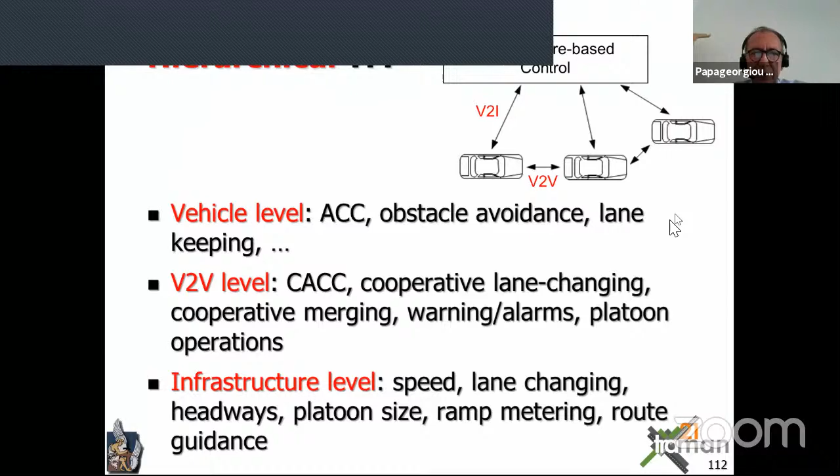So, my last slide, conclusions. Motorway traffic flow can be substantially improved, even as much as 50% reduction of travel times at peak period and specific locations. Unfortunately, what is being used currently in the field is very often not the best possible. So we may talk about technological giants with a baby brain for many traffic control centers.

Of course, some blame is also for us, researchers. Sometimes we are developing what we could call methodological zombies. That means methods that are good for writing papers, but are questionable when operating in the real world.

But I'm always emphasizing to my students, there is nothing more practical than a good theory. So a good theory does not mean necessarily complexity or I don't know what. A good theory is usually simplifying things and rendering them more practical. And in fact, we should go for as simple as possible and as complex as necessary.

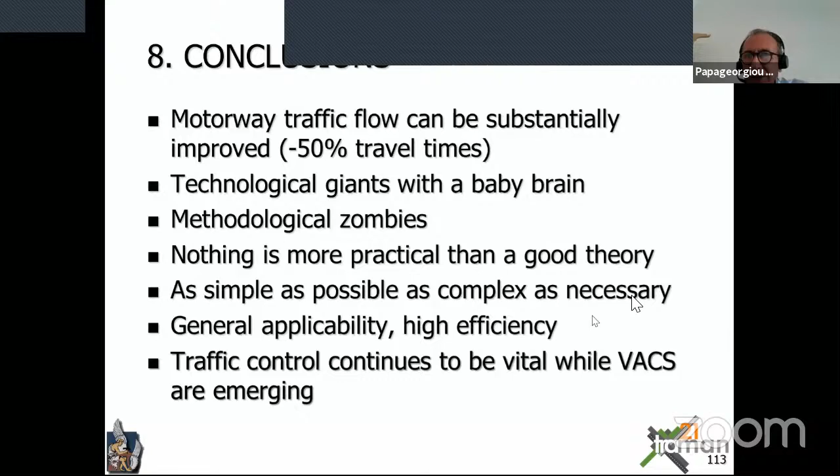I'm sorry that I was not very good with the time, and so it's already 4:30. I would be glad to receive questions if there are any.

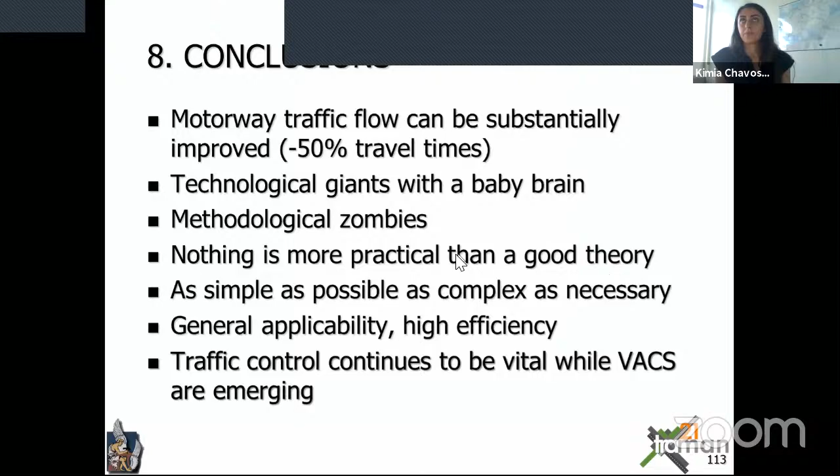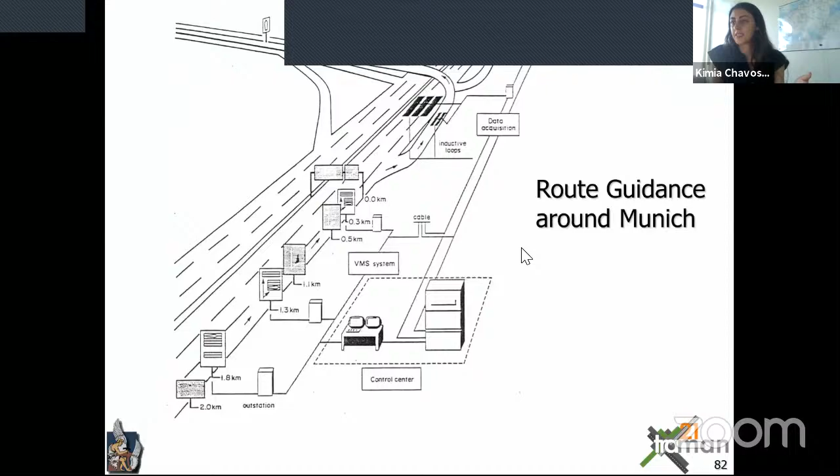Okay, maybe I can ask a question until the others come with some questions. My question is about the application of variable speed limit. What should be the characteristic of a network and, let's say, a congestion part, when we can really apply the variable speed limit? Because for applying that, I've tried a little bit with simulation, and there are some circumstances that we need to have, for example, some lanes available to apply this variable speed limit, and then it also has some relation with that: how big is the bottleneck, and how much we can really release or decrease the speed, and where the off-ramp and on-ramp are. So I wonder if we can formulate those things all together.

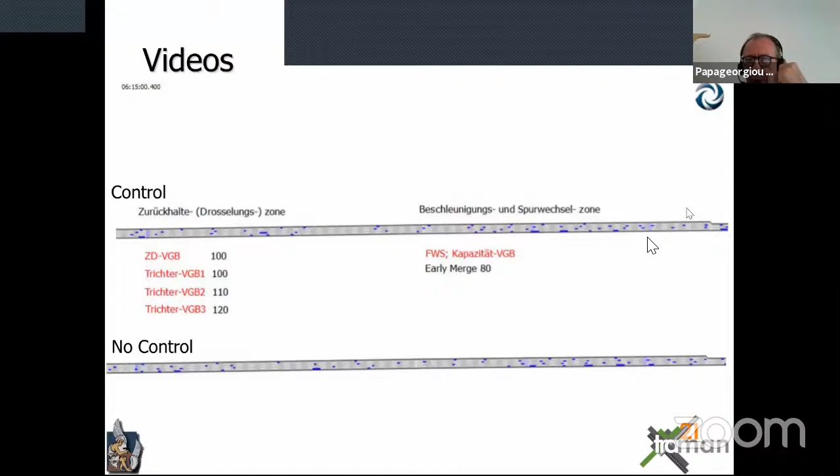Yes, I understand the question, and I agree that when you consider a specific infrastructure to look at a specific congestion or what you can do about it, there are various things that may be of importance. First of all, of course, there must be, without control, a congestion with a capacity drop. That is usually the case, because in case of congestion, the outflow is usually reduced.

Then you should be able to apply variable speed limits that are sufficiently low. For example, here you are losing one lane, you have a lane drop. So the arriving flow is on 4 lanes, and you need to reduce this flow with variable speed limits roughly to the flow of 3 lanes. And to do this, you need to be able to operate sufficiently low variable speed limits. This is not always possible.

We don't have the time to go into the details, we may talk offline whenever you want about that. But roughly speaking, if the level of required reduction of flow, of holding back flow, is high, then you need to also be allowed to apply accordingly low variable speed limits. This can go down to 40, in some cases even less kilometers per hour. And of course, on a highway, authorities are not so keen to do it, so they may tell you you're not allowed to go below 60. In that case, you will be able to retard the onset of congestion, but you may not be able to avoid it completely.

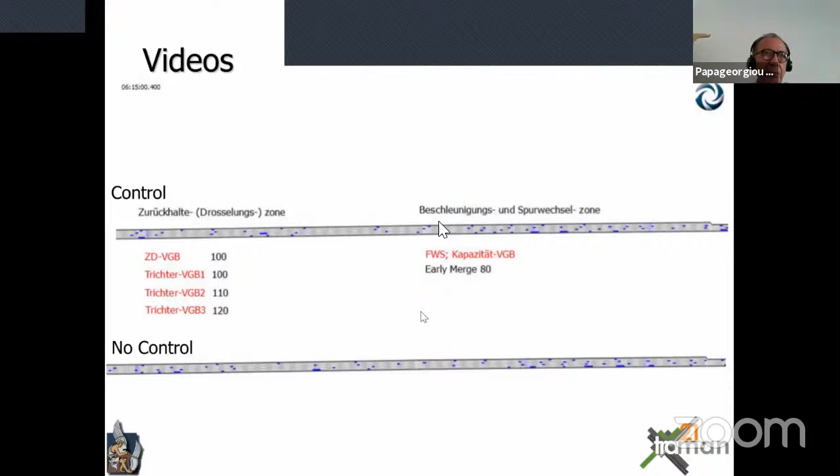So I confirm what you say, that for reasons we don't have the time to elaborate in detail, if there is a limit in the lower variable speed limit that you are allowed to apply, then you may not be as efficient as that. You may be able to delay the onset of congestion, but not completely avoid it. But again, we can talk on another occasion about the more details of that.

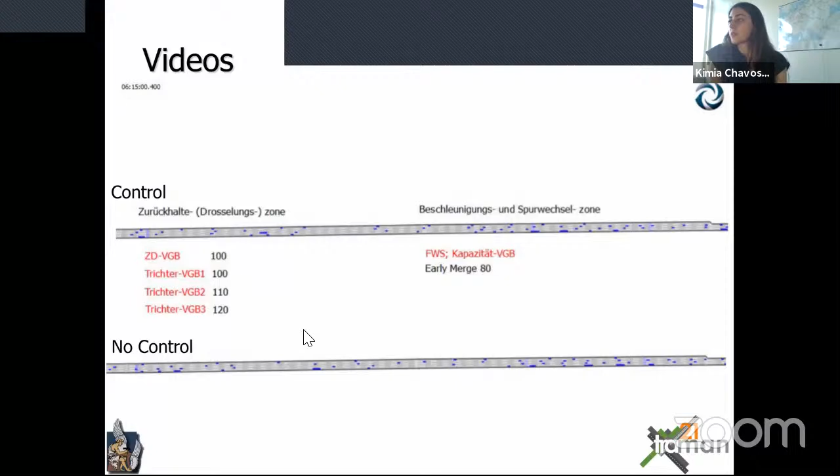Yeah, of course. And then maybe my last question is, what do you think is the important characteristic that we should consider when modeling the variable speed limit, for example, to adopt in MetaNet? Because there are different modeling approaches for variable speed limit that we can apply to show the effect of applying variable speed limit in the traffic situation. So what are the important characteristics that this model should have?

The model should be able to, I mean, the way we are doing it is by changing the fundamental diagram. More specifically, I didn't explain these equations - this is the fundamental diagram with the 3 parameters, and we are modifying each of the 3 parameters as an affine function of the variable speed limit value. That's the way we influence the fundamental diagram.

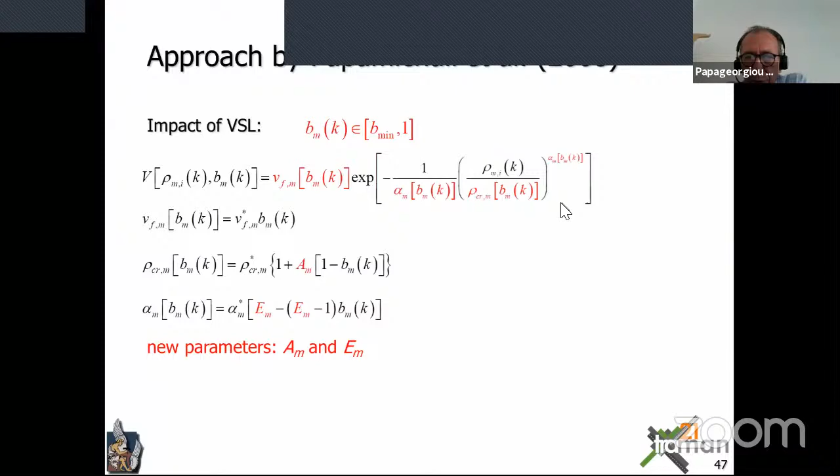And as I mentioned, I think that in today's traffic with today's vehicle technology, apparently, at least that's what we found in analysis of data, there is no capacity increase by applying the variable speed limit. So even using something like that could be good enough.

You probably are talking about a paper by Jose Ramon Frejo, who tried to compare different such models and presented a third one that is even more accurate. I'm not sure if you have this paper in mind, or if you know that paper. Yeah, I had a look at that paper. Yes, which may be useful to even increase a little bit the accuracy or the pertinence of the way you model. But for the basic things, any of the three approaches probably would work sufficiently, maybe not be as accurate as others, but would work for the purpose of testing different things.